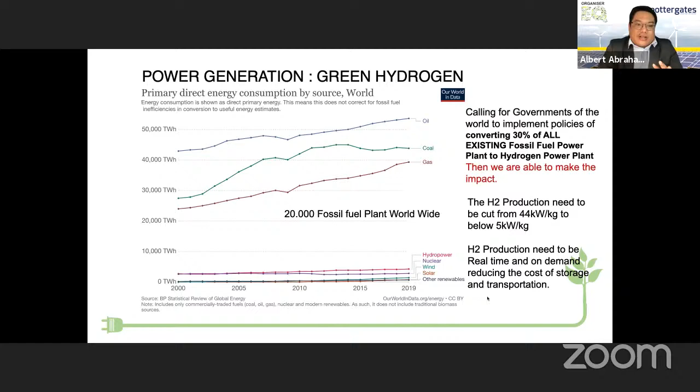One area we need to focus on is hydrogen production. We need real time, on-demand production, because the cost of storage and transportation would really drive hydrogen cost up. So that's something we must look into - how do we produce hydrogen in real time for on-demand purposes. This is another dream in regards to power generation.

The second dream is in terms of transportation. Transportation is actually the second largest greenhouse gas emissions sector. My suggestion is a 3-step approach. One, converting existing vehicles to hydrogen-based vehicles - there are two ways: diesel engines running on hydrogen fuel, or electric cars using hydrogen fuel cells instead of batteries. Second, new cars or trucks with electric motors running on hydrogen fuel cells with a hydrogen tank. Third, getting a hydrogen generator efficient enough to retrofit into a car or truck to generate enough hydrogen needed for the vehicle. This is my second dream in terms of transportation.

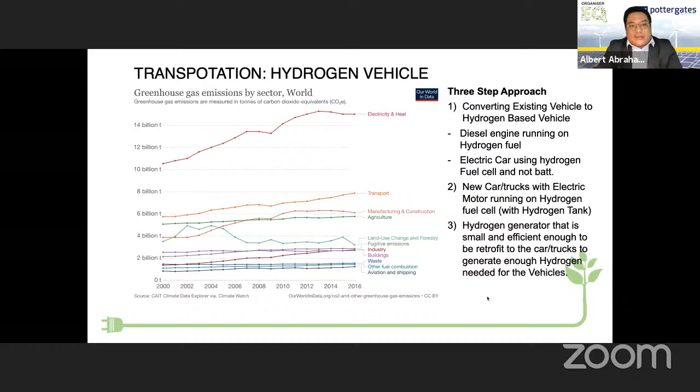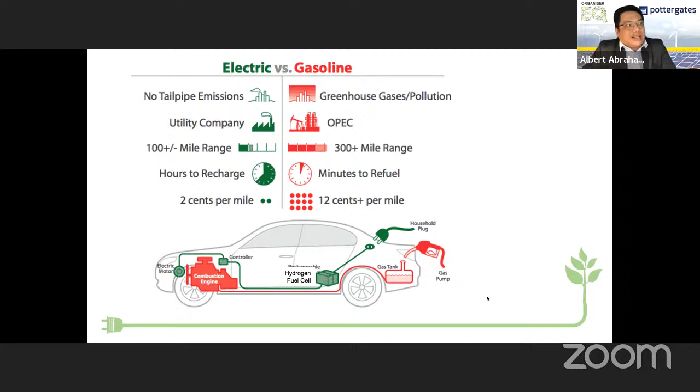Let me give an illustration of this dream. In the market now, people compare electric cars versus gasoline - the pros and cons of each: whether the recharge time is too long for electric versus gasoline taking less time to refuel, electric mileage being low versus gasoline mileage being high, and so on. So why not go into the future of hydrogen, where we retrofit the car into a hydrogen generator, change the fuel tank into a water tank, feed it to the hydrogen generator. The hydrogen generator can power the hydrogen fuel cell for the electric motor or controller, or the hydrogen can be fed into the combustion engine to run the car. Why not have the best of both worlds?

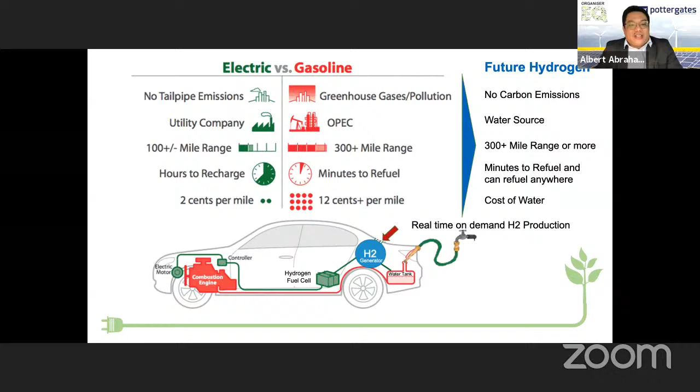So you'll have no carbon emission, you just need a water source - no utility company, no OPEC or anything like that. In terms of mileage, you have high mileage, and for refueling, you just pour in water, so it doesn't take much time. The cost of the fuel is basically just water. This is why I call it a dream, because it will take a lot of research for us to get there.

So what does the future look like in a more logistic way, on a larger spectrum? Hydrogen's energy density per unit mass is three times higher than traditional jet fuel. So why not have an airplane that runs on hydrogen fuel, with a hydrogen generator that generates hydrogen from water collected from the clouds? You've seen Lost in Space, where they harvest ammonia from the air, process it and use it - something similar could be done here.

Why not an airplane that can fly without even needing to land, collecting water from the clouds and using a hydrogen generator to generate the fuel required for the engine to run. Of course this is just a dream - the technical part I'll leave to the engineers, aerospace people and others to come up with possible pilots or something.

Then in terms of cars - a car with a hydrogen generator that runs on fuel cell or hydrogen engine, just pour in water and it can run. And I'm even saying a flying car with hydrogen fuel cell, because the energy density is so high you can actually boost up the car. Whether fitted with a jet engine or whatever, if the technology is available in the future, you could even fly the car. With hydrogen fuel, we are entering a new era of opportunity.

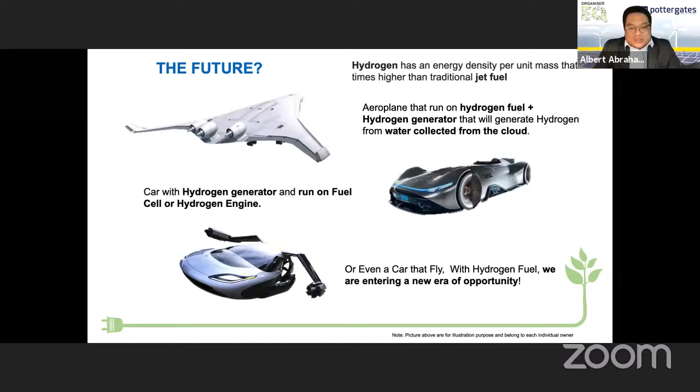That's the dream I wanted to cast out to everyone, and I'd like to see your feedback. All right, thank you everyone.

Thank you, Albert. To be honest, it was a bit more dreaming than what I expected, but it's okay.

That's why it's a dream.

What first came up to me was the second slide, where you stated that electricity consumption should go from 44 kilowatt-hours per kilogram to 5 kilowatt-hours per kilogram. That's a huge ambition. We all know electricity consumption is the elephant in the room, the main driver to make green hydrogen really cheap. But going from 44 down to 5, what do you think needs to be done, and do you have any assumptions on how this can be realized?

Actually, there is research that partners of ours have done, and basically they have reached that level already. It's just a matter of commercialization now. So you'll probably see the product coming out mid of next year, or mid to end of next year.

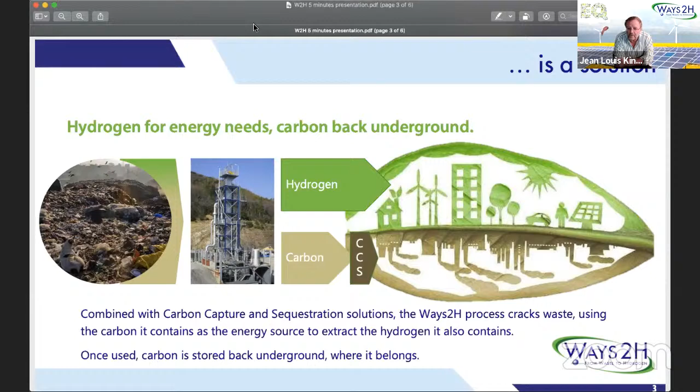A few words about what we specifically are doing. We are commercializing a solution that has been developed in Japan over the past almost 20 years. I was actually in charge of engineering and building the very first pilot of this solution, which specifically targets small to medium scale production systems.

There are still a few challenges about hydrogen logistics. What we promote, what we think is an easier way to develop this hydrogen infrastructure, is gradually - just like gasoline stands started in the early 20th century, when people bought gasoline at drugstores, and then the first gasoline stands appeared, peaking at about 200,000 in the United States in the 60s and 70s. We're now at 110,000 gasoline stands in the United States. Well, let's build hydrogen stations one by one, possibly ten by ten - that would be a little better.

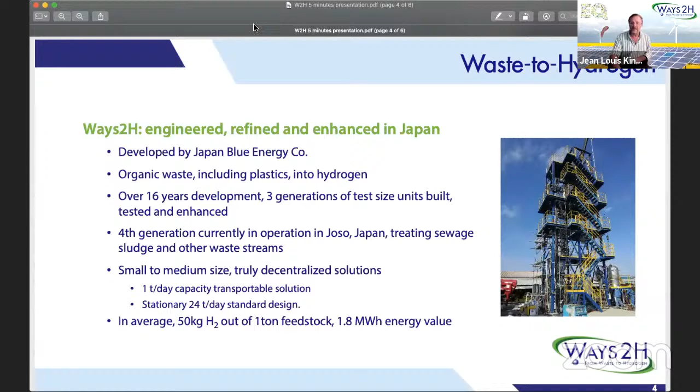Also, gathering $500 million or $1 billion to build the equivalent of a nuclear power plant takes time and is a major risk. Reducing risk by reducing the individual investment or the individual size of the project is also a way, I believe, to more smoothly and easily develop this infrastructure that we badly need - that truck manufacturers, forklift manufacturers, car manufacturers badly need today, because you cannot sell a fuel cell car if you do not have a wide hydrogen production grid. This is what we think we can offer as a complement to green hydrogen solutions, which are also very useful.

They all have their cost. We talked about how many kilowatt hours are needed to produce hydrogen, etc. I think it's very important, but gasoline production as well as other energy sources development, well, initially those were not that efficient, and efficiency has increased over the years. This is something that I believe will also happen with hydrogen, as long as we keep trying to be realistic.

And sorry, Albert, but the dreams are great. I think it's very important to have a vision, but to make real and concrete progress, we first have to stick with reality and tackle actual and very current problems.

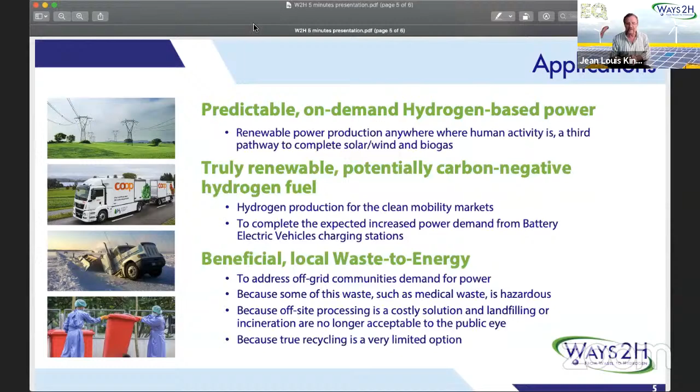How much of the total hydrogen used today do you think can be made out of waste recycling? And second, connected to this, what do you think the lowest possible price could be to make hydrogen this way?

The US Department of Energy released a report in 2017 called the Billion Ton Report. It's called that because they identified potential sources for biomass, including ag waste in the US, amounting to above a billion tons. I think they were saying about 1.2 billion tons.

When you look strictly at the chemical formula for that biomass, you realize this billion-ton biomass is the equivalent - you could potentially extract about 50 million tons of hydrogen. And 50 million tons, considering all the relative efficiencies, if you look at the power of the gasoline-based powertrain versus the hydrogen-based powertrain, that's the equivalent of 90% of the gasoline being consumed in the United States today.

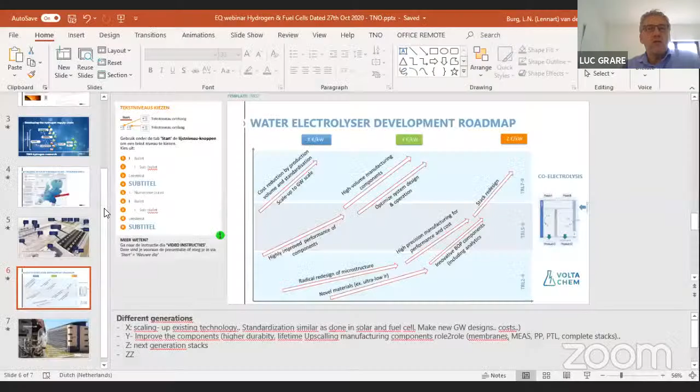I'm leading the hydrogen development at TNO. TNO is a research institute in the Netherlands. We work with around 1,000 people, experts on renewable energy. And the reason why we work on renewable energy is, you all know, we are breaking records with respect to climate change. This is only the newspapers of the last week - the Netherlands had the hottest day last week, but also high snowfall in Canada, and California is getting severe weather conditions, and the greenhouse gas emissions are just rising.

And I think that's why we're all joining to develop renewable energy and also hydrogen, which will take a major role, as said in the introduction, to replace fossil fuels where there is no other option. So where electricity is coming too short, there hydrogen is coming in.

Yeah, and we're breaking records. Unfortunately, that's the situation, I think. I think we should put our efforts - and that's the objective of our research institute, for the energy unit at least - to work on technologies which also behave to come with solutions.

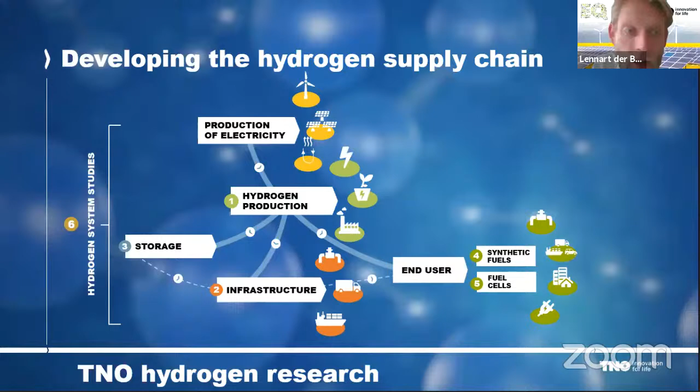And in our project we really look at where hydrogen can really be a solution. So our statement is: where we can use electricity, we should use electricity, and where there's no other option, please go to the hydrogen route.

And we also, at a certain moment, are exceeding the electricity use in the Netherlands. So, as the previous speaker already said, we're using much more fossil energy compared to electricity use. So part of it will be electricity, part of it will be hydrogen.

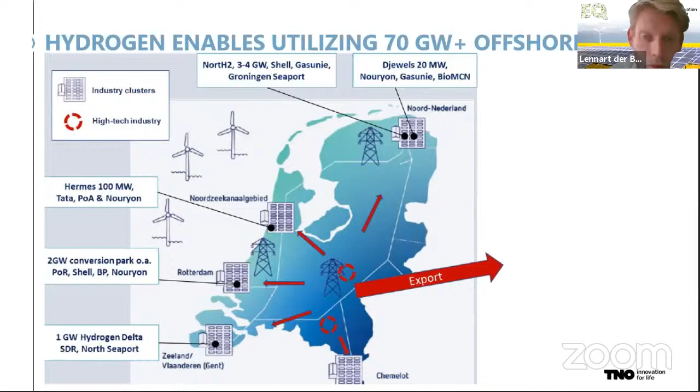To give you an impression, in the Netherlands now the current hydrogen production is 1.6 million tons of hydrogen, but it's all gray hydrogen. If we want to go to green hydrogen, we need huge amounts. And over the last 10 years, the total installed capacity of electrolysis is 160, 170 megawatts worldwide.

We need the power electronics, we need the demi water, we need the compression, we need the cooling. So this total plot size will be around 10 to 20 hectares. And we did preliminary designs with partners, with ISPT and industry partners, in different parts of the Netherlands.

And this is the roadmap for how we think the electrolyzer development will further continue. These are different generations - generation X, Y, and Z. The first challenge is standardization. You see all the electrolyzer manufacturers focusing on standardizing their products, now mostly containerized, and focus on design - so teaming up with EPC contractors.

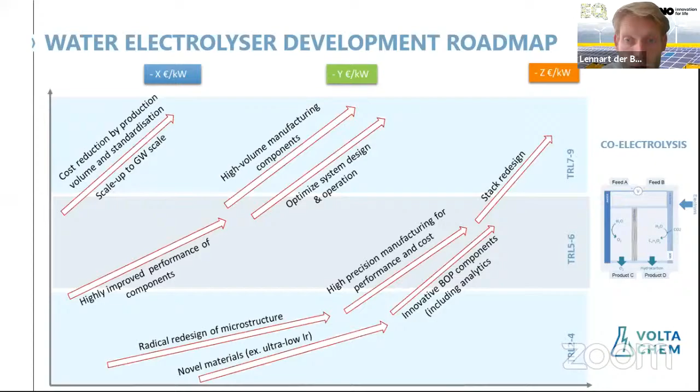The next step we see in the future is really co-electrolysis. We now talk about a lot of water electrolysis. The next step is really, beside water, also using CO2 and making fine chemicals using electrochemistry, and that we're doing in our VoltaChem program. And lastly, this is where we're doing our research.

But if we really go to gigawatt scale using the PEM technology, we need the worldwide iridium stock, the availability of all the iridium only for the electrolyzer. So this is a material issue, and other issues we definitely should solve to go to the gigawatt scale.

And the other important issue is obviously we need renewable electricity, and we really need a lot if we want to replace all the fossil fuels. So it will be a combination of green hydrogen and also low carbon hydrogen, and using electricity directly.

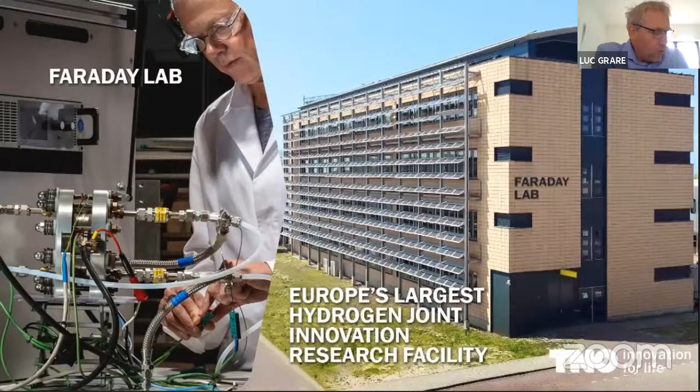I've got one question. I 100% agree with you that we need to come to below 500 euro per kilowatt peak, all in, connected, etc. Now, what is your idea which year we might be there on a gigawatt scale plant in Europe? And what do you think by then probably could be the electricity consumption we talked about before? But I think that's also to see those two parameters.

In the FCH Joint Undertaking strategic roadmaps are concrete targets for where you want to go with respect to costs. In practice, we see the really large projects - a lot of costs coming extra, the infrastructure costs, etc. So I think the cost level where we are now, let's say around 1,000 to 1,500 euro for an alkaline system completely installed. If we want to really go to cost reduction, it's all about volume, because all the electrolyzers now are handmade nearly. So if we need to go to higher units, and if we break that level, then we are able to go to cost reduction. So that will be in the next, let's say 5 to 6 years, where we're reaching below the 500 euros, if we really go to the high numbers, because that's really important to create that volume.

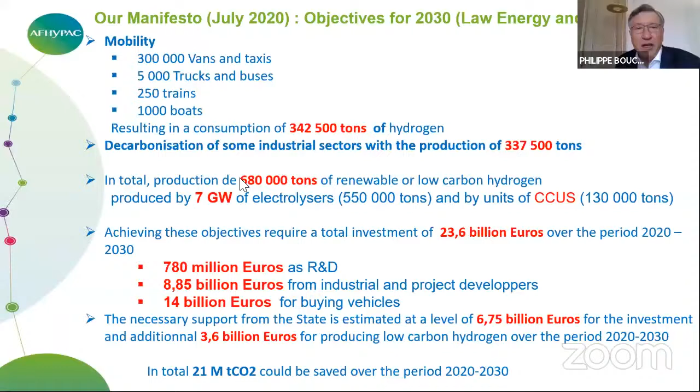This was the situation end of July, and then on the 8th of September, two ministers presented the French hydrogen strategy. This time it's not only the Minister for Ecology, but also the Minister for Economy. It is considered as part of the recovery plan after, or during, COVID. It is also in line with the objectives of President Macron to develop a French industry on a new basis, based on new technologies - IT, of course, but also hydrogen.

Second pillar is to develop professional mobility - heavy-duty mobility such as buses, coaches, trucks, garbage trucks for municipalities, and so on, but also vehicles for transportation of goods, what we call last mile mobility. This implies developing vehicles and components for vehicles, but also infrastructure for refueling. The third pillar is to maintain efforts for research, development, and innovation.

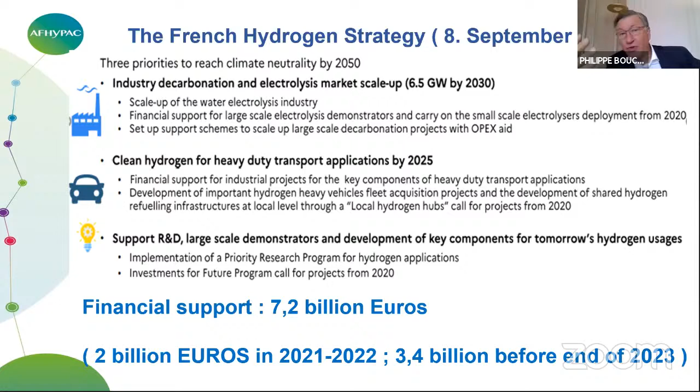The support from the French government takes multiple forms. The aim is to bring this support along the complete value chain of hydrogen: first, to produce electrolyzers and develop gigafactories of electrolyzers, but also to foster the demand of hydrogen for the decarbonization of industrial sites, to produce equipment for H2 mobility and hydrogen vehicles, and also to develop infrastructure for transporting, storing, and distributing hydrogen.

It will be done through calls for projects, which will be managed by the French Agency for Ecology, ADEME, and also through a very important tool, what we call IPCEI, Important Project of Common European Interest. This approach was used for batteries, and France wants this to be done also for hydrogen.

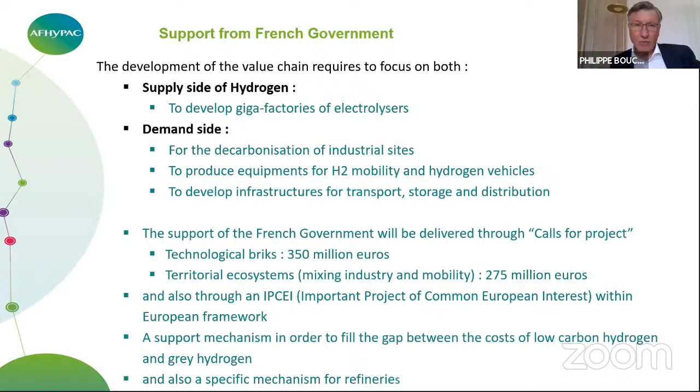For that, there is a strong necessity to scale up to achieve mass production. I already mentioned gigafactories for electrolyzers, and that we need by 2030 7 gigawatts of electrolyzers in France. At the European level, there is this initiative of 2 times 40 gigawatt electrolyzers. So we also have to reach the scale of millions of tons of hydrogen.

Second key challenge, which is very important as well: we all consider that, of course, we have to go towards renewable hydrogen. But for that, we need renewable energy. And what if the development of this green electricity is not fast enough? We also have to consider alternatives like carbon capture and storage. In France and some other European countries, nuclear power, nuclear electricity. And also, as Germany announced, to import green hydrogen from countries where renewable energy is abundant, North Africa for instance.

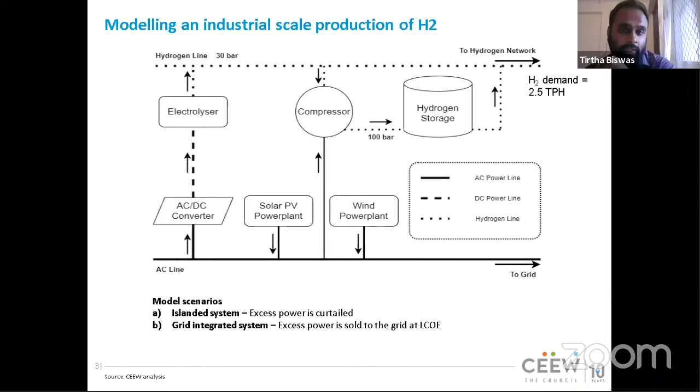The electrolyzer is coupled with both solar and wind, and we also have storage to ensure that a constant demand of 2.5 tons per hour of hydrogen is met at all times. We looked at 2 different scenarios: one is an islanded scenario system where excess electricity from renewables is curtailed and the cost is borne by the hydrogen consumers. The other is a grid-integrated system, although one-directional, where we assume excess electricity can be off-taken by the grid, with an additional revenue component.

Interestingly for India, we tried to identify future demand centers, taking as a rule of thumb the metropolitan cities and major industrial clusters like iron, steel, fertilizer, refinery, and petrochemicals. Interestingly, we also see that the majority of demand clusters today only have access to solar profiles, solar resources. So we chose locations we're calling favorable because they have both solar and wind together, mostly in the western and southwestern parts of India.

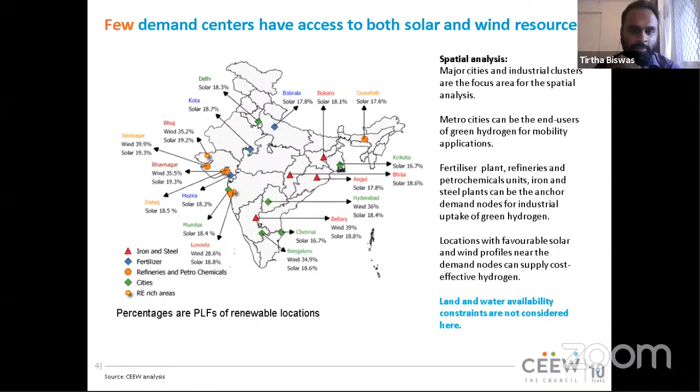That means you're having a stable capacity factor throughout the year, which also means that the electrolyzer can have better full load hours, and hence reducing the costs.

The second part, what we also see is, as you keep on increasing your renewable system size, there comes a point where your cost decreases, but beyond that point, there's no further impact. That point is basically where your electrolyzer achieves the maximum plant load factor. For a green islanded system, if you keep increasing beyond that inflection point, your cost increases because you're curtailing more, which is indicated by the graph as a U shape.

Whereas for a grid-integrated system, what happens is the excess electricity, since it's being off-taken at the LCOE prices, does not impact your levelized cost of hydrogen. So basically, as you keep on increasing your RE to AE ratio, your hydrogen cost sort of flattens out.

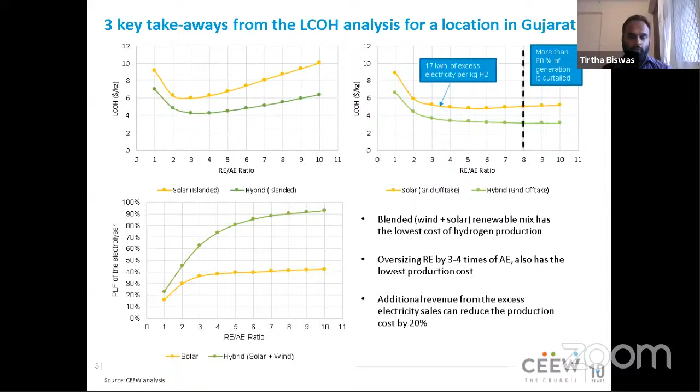The third point we see here is, in the short to medium term, if you can sell that excess electricity to the grid, you are reducing your cost by 0.7 to $1 a kg, which is roughly 20% of the production cost for that particular location in Gujarat.

However, if you see in the graph on the right, a developer might choose to operate at a very high RE to AE ratio, something like 9 and 10. But operating at that point means he has to curtail 80% of his total generation.

Now, the problem is not with the 80%. The problem is basically that the 80% is available only for certain hours of the day. And your grid needs to be flexible enough to absorb all that electricity.

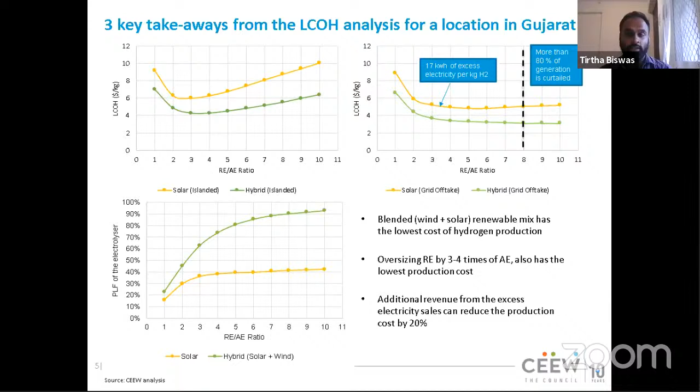To give you an example, for that particular location in 2020, to produce 1 kg of hydrogen, you are generating 17 kilowatt hours of excess electricity. So the grid needs to handle all of this just to ensure that the cost further reduces.

What we see in 2030 is most of the locations can become competitive with blue hydrogen plus CCUS, at a natural gas price of $11.5 per MMBTU. In 2040, all locations become competitive with blue hydrogen at a natural gas price of $6.3 per MMBTU.

Now, there's a reason why I'm using two different natural gas prices. In India, the price of natural gas is not market-driven. There are tiered systems. Certain strategic industries like fertilizer and urban transport get natural gas at cheaper prices, whereas most industries today are paying somewhere close to $11.5 per MMBTU.

While one may argue that the global prices, the Asian LNG prices, are certainly lower, if you look at India's contracts, they are still oil-linked and pretty much hovering around more than $10 per MMBTU. Now, one interesting observation is, if you look at the wind and solar locations, they have a particular cost advantage compared to your solar-only locations.

What it also means is that by 2030, they can easily break even with the cheapest blue hydrogen in the country. And by 2040, they can become competitive with the gray hydrogen produced in India.

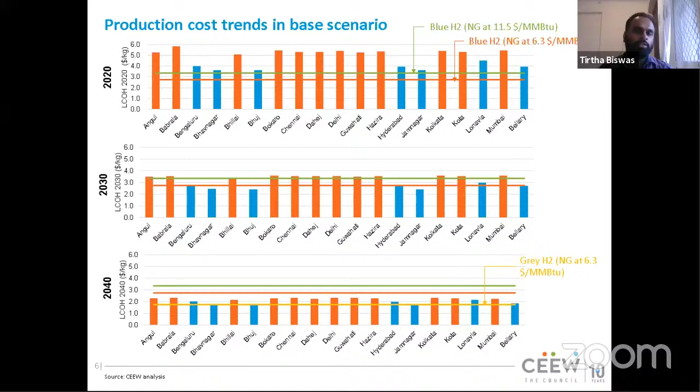And it's almost a chicken and egg situation. A pipeline cannot be invested in until you have demand. And if you don't have cheap, low cost hydrogen, you just can't create the demand. So that's where policy actually assists.

So finally, I want to close off with this slide and also pose a question to my fellow panelists.

In one scenario we saw, using the most aggressive reductions in electrolyzer cost to $200 a kilowatt, hydrogen storage cost to less than $100 a kilowatt, 8% discount factor, we see that the cheapest India can produce hydrogen is $1.7 per kg. While it might be at that price of $1.7 per kg, you might actually break even with coal and lignite products, which is used mostly by your iron steel industries, and then to some extent furnace oil, which is used in industrial heating demand.

But for hydrogen to truly displace the bulk of the Indian industry's energy need, it has to displace coal, right? And the equivalent price is 0.7, or 70 cents per kg. So the question is, is that even achievable? And what are the further policy nudges that we need to make to bridge the gap? So with that, I close my presentation and I can take further questions.

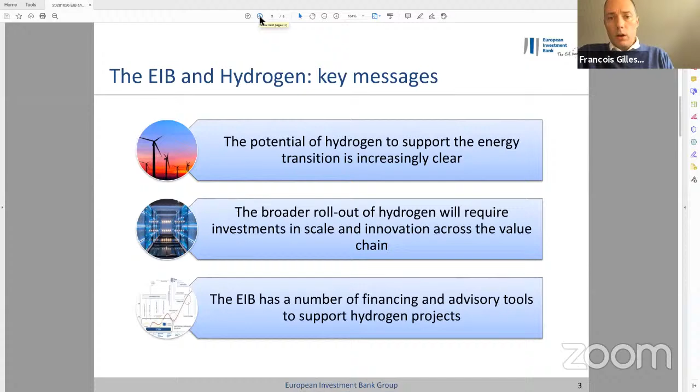That being said, much more broadly, we have our balance sheet, and we have the ability to support much larger, well beyond impact finance, hydrogen infrastructure projects. But I think there we will probably need to see a phase of transition, and probably in the short term it's more likely that our impact finance tools, which have a higher risk absorption capacity, are called to use.

And then on the advisory side, I come from the advisory part of the bank. Advisory is one of the origination points into the bank, and we provide support, advice, sometimes consulting support to promoters, in various ways. I think that's one of the ways we see our potential contribution to the development of hydrogen, by helping these consortiums and large project ecosystems that are complex by nature and have a bit of self-discovery. We potentially have a role to play here, helping these consortiums find their way to a market aligned, potentially investable and bankable proposition.

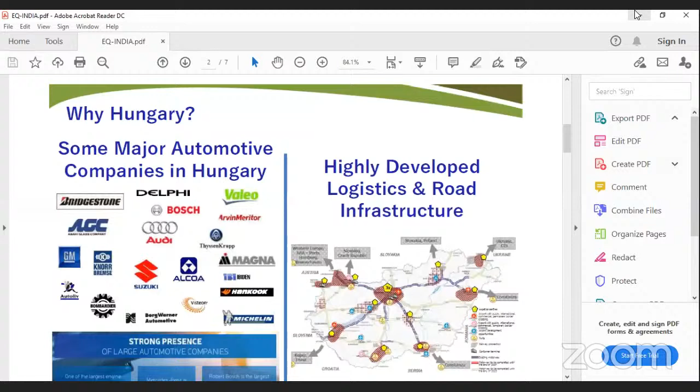Moving on, the very first question is why Hungary? As you might be aware, there are very big companies involved, especially from the automotive sector in Hungary. As you can see on the left-hand side of my slides, the presence of, for example, Audi from Germany, Mercedes-Benz, and Bosch - they're big names, and they have their local manufacturing plants in Hungary, plus a few other names on the list.

The other very important reason we were looking at this market, especially for fuel cell development in the eastern part of Europe, was that we compared different countries. We looked at labor cost versus production cost in UK versus Germany versus France, and took some data from Hungarian manufacturers. The very first thing which was interesting was the labor cost was roughly half of what we would expect if we made this bus in the UK, for example.

The second thing we found is the corporation tax for businesses running in Hungary is the least in Europe, which again favors this kind of business if you want to do production in Hungary. And the other reason, as you can see on my slides on the right hand side, Hungary has a very good interconnect with other parts of Europe.

For example, it has a very good network with Poland, Slovakia, Ukraine, and the western part, for example Germany, Serbia, and also Croatia. So it means you are in the central hub of Europe, and you can easily connect to different parts via ships, via road, and via other networks.

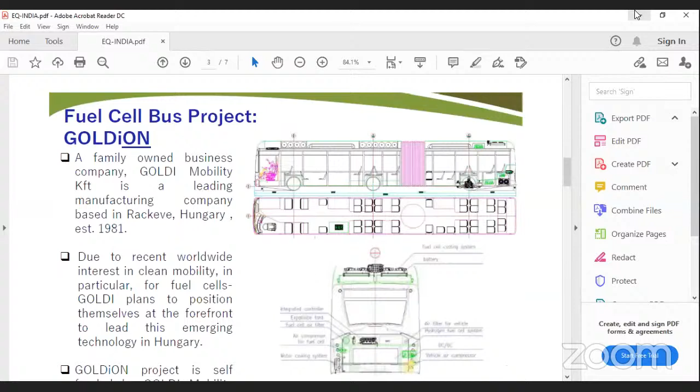Okay, so the project itself - the project name is GOLDiON, named after the actual company name, which is Goldi. This GOLDiON project is mainly financed and run by GOLDI Mobility Kft, which is a Hungarian company. It is a family-owned business, a leading manufacturing company, based in Rackeve in Hungary, and it was established roughly 40 years ago.

So it has a very strong reputation in Hungary, and they are mainly the manufacturer of various key components for electric and diesel drivetrains, and now they are looking to move forward from fossil fuel based mobility business to clean energy, mainly pure electric and fuel cell electric business.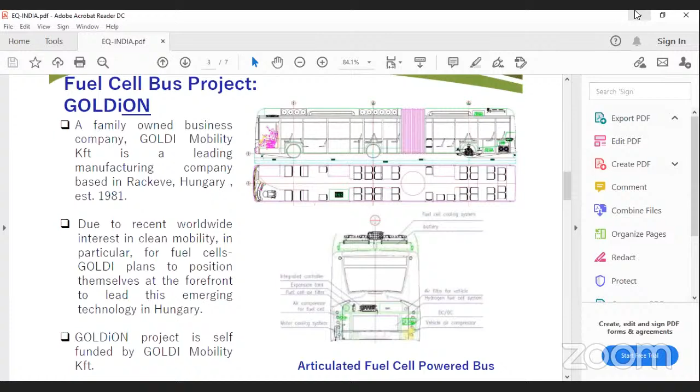Due to recent worldwide interest in clean mobility, they were looking to partner with other key players, especially to set up the supply chain, not only for the fuel cell, but also for the hydrogen production and hydrogen refueling business. And as I mentioned, this project is completely phase one, which I will mention in my next slide, fully funded by this company.

In terms of the business plans for the fuel cell buses, we plan to split this project into 3 key phases. The first phase, which is already in development, is the first 18-meter prototype fuel cell bus, which we are developing as we speak in Hungary.

The second phase is a rollout phase, meaning once the first phase is done, we will try to market this bus to other parts of Europe, and also locally in Hungary, to get attention and possibly orders, and roll out multiple buses. This would include assembly of both 12-meter and 18-meter buses in Hungary for rollout to various parts of the EU.

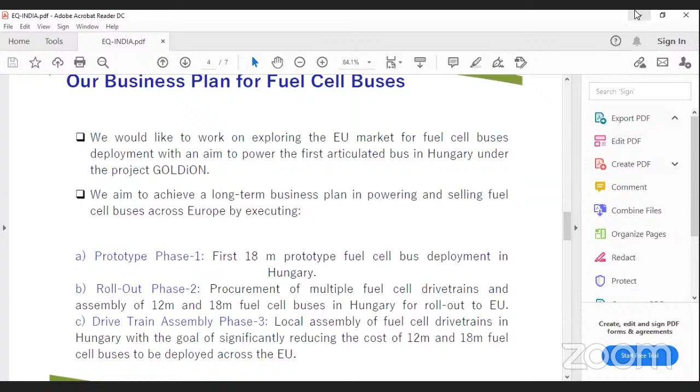The third part is a further extension of phase 2, moving on to phase 3. In phase 3, we plan to develop a local drivetrain assembly, going deeper into the fuel cell drivetrain, meaning we look to locally assemble all the parts. The key thing here is we also aim to locally assemble the fuel cell modules in terms of stack, and then the balance of plant altogether - so it's a complete fuel cell stack assembly as well as the drivetrain assembly.

As you'd imagine running this kind of project, funding is one of the key challenges anyone can face, especially moving forward from the first prototype, phase 1, to phase 2 and phase 3. So earlier this year, in February, we held a meeting with the local Hungarian investment promotion agency, called HIPA.

Together with our fuel cell stack partner, Horizon from Singapore, their CEO attended that meeting. I was there, along with the CEO from GOLDi Mobility, and some local government people. We initiated discussions regarding phase 2 and phase 3, and were asked to submit a proposal. We have just recently submitted it and are looking for the outcome. The plan is to get some part funding for phase 2 and possibly phase 3.

A very brief summary: we believe Hungary is an ideal location, as I've mentioned before. There are key advantages in terms of the favorable automotive market due to the strong presence of key players. The second biggest advantage for us is the labor cost versus the low corporation tax.

The GOLDiON project, as we speak, is moving forward, and we are in the development stage of the first 18-meter FCEB bus. We are in high-level discussions with government representatives for phase 2 planning. We are also talking to supply chain partners for batteries, supplies, hydrogen tanks, and just today I was talking to some suppliers for the refueling business for our buses.

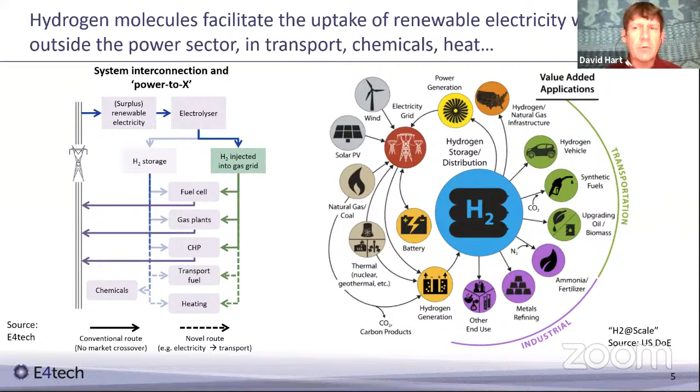I think we all need to be cautious about not over-promising what might come. Because what I want to talk about in the next couple of minutes is two things. Hydrogen gives this opportunity to incorporate renewables further into the energy system. We've seen this diagram slightly redrawn already this morning, but it's really important - it enables this decarbonization of the molecular side of the energy industry with the electronic side. So we take renewable electrons, turn them into renewable molecules.

Having said that, we've talked a lot about cost, and what we're really looking at here is a system - it's a system cost, it's a system benefit. So just the cost of hydrogen production is not what we need to look at. What we need to understand is what are the avoided costs, for example, of alternative storage mechanisms? What are the avoided costs of pollution, of people dying from air quality effects?

What about carbon emissions? That's really what we're driving at. So we do need to be competitive, but we need to be competitive on a system basis - producing hydrogen for a reasonable cost and then using it in an intelligent way to displace something which is otherwise less efficient or more polluting or otherwise does not give us a benefit. And that's really important, because that will also cause disruption.

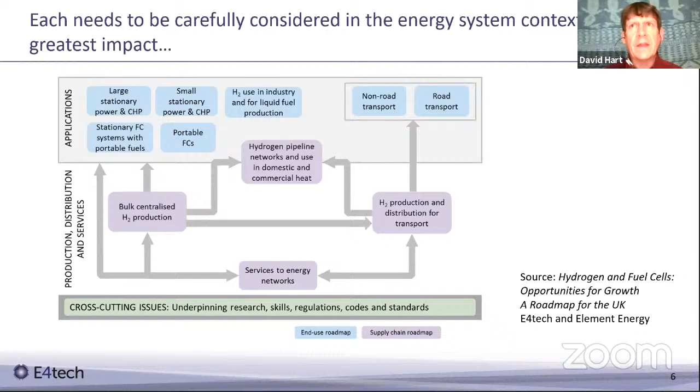And we see this already. We've talked about India - there's the opportunity there - but in Southern Africa, in Southern America, we see the opportunity for new suppliers of energy. This will displace the fossil fuel industry. If you look at what Shell is doing, what BP is doing, what others are doing, they're very, very concerned about how they will continue to exist in a low carbon world.

So when it comes to the end of 2030, I suspect, and we're looking forward to a new decade, it's not going to be just about competing on cost with existing fossil fuels. It's also going to be making sure that we have convinced the investors, the institutional investors into these large companies, that these companies are climate resilient, that they have a plan going forward which is low carbon and very likely includes hydrogen.

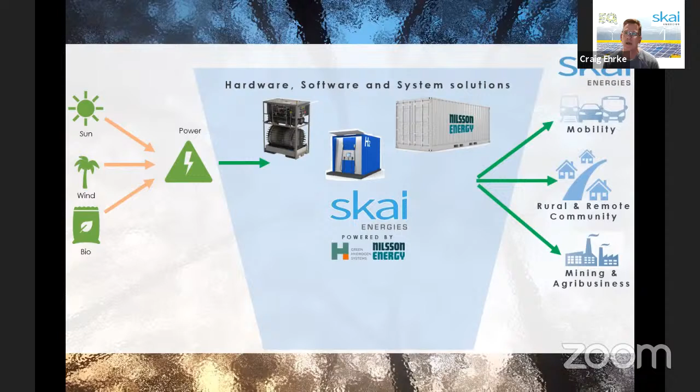Great, thank you, Luke. What I wanted to talk about was more where we are today in Australia, guessing that will probably play out into a lot of other countries as well, looking at what drives circular growth from this point, taking into account the things that have gone before. Just quickly, Skai Energies has some European partners who make electrolyzers and standalone power systems. We take ideally green renewable power and use that to provide energy across the mobility space, remote rural communities, mining and agricultural spaces.

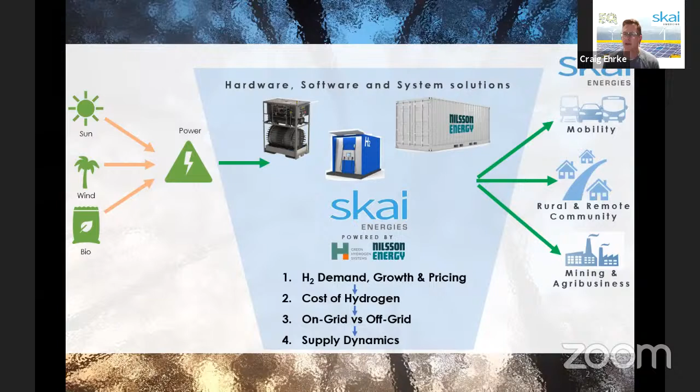What I looked at though is really what's driving demand, but more importantly, growth and pricing. There's been a lot of great comments today about growth coming from looking at where we can displace fossil fuels today. If there's diesel being used to power mobility or run remote communities and mining communities, if we can displace that, we can obviously get growth today. As someone mentioned today, pricing is critical, and until we can really meet the price of the fuels we're trying to displace, we will struggle to get true hydrogen growth.

We all know how hydrogen is manufactured. Some of the big things that really impact the cost are the cost of the inputs - the power and water used to produce it. But also one of the things I'm finding really critical is the amortization and the use of the electrolyzer itself. They are very expensive today, and being able to utilize that for as long as possible in any given day is really critical to driving those prices down.

Jean-Louis talked earlier about doing it on a very local, decentralized manner, and that's also critical because the cost of transport can be quite high, and it all adds to the cost, which impacts pricing and makes it an unideal solution. To try and help that, we look at on-grid or off-grid generation, and the problem with doing it on the grid is the congestion issues of many grids and their ability to cope with the large amount of power required to run electrolyzers.

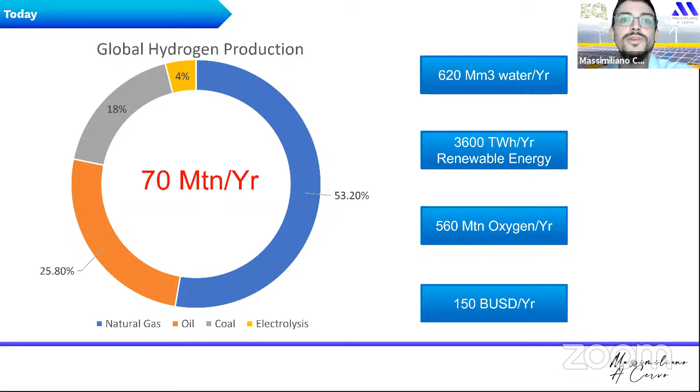So talking about renewables and achieving a hydrogen economy, this is actually where we are trying to go at the moment. What we need to think is that hydrogen was once green—around the 1920s, 1930s, there were a couple of green electrolysis plants from hydro. They were using it for fertilizer production. So we need to think about what happened in between that made what was once viable, unviable.

So it has to be basically about scale and cost, and the cheap cost of fossil fuels. So how can we begin to decarbonize hydrogen instead of trying to sell hydrogen to whatever use we can think of? Just think about which could be the economically viable sectors to decarbonize in the short term.

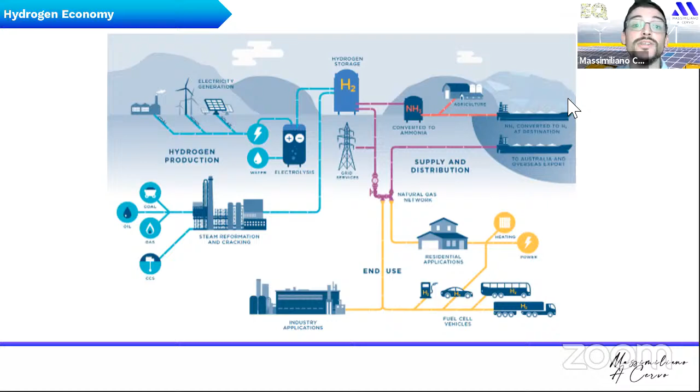So this is basically my analysis. My strategy would be considering an immediate off-taker—sorry for my misspelling here, this should be with an N, but don't worry about this. Basically, considering accelerating the pace of the hydrogen economy. How do we manage to do that? Well, we already talked about decarbonizing the existing demand, and doing this in the short term is going to be very hard.

So we should think about which energy mixes can actually give us the best load factor to achieve a lower levelized cost of hydrogen.

So I was doing some kind of analysis for the industrial sector. The industry sector, without thinking on refineries, because that's a hard level and a hard sector to reach with hydrogen at the moment, we would need around 37 million tons a year of hydrogen.

So what are we going to use to decarbonize that sector, which actually would need around $74 billion a year of investment? This can sound like a lot of money, but it's only 5% to 7% of global investments in oil and gas, and around 7% of the technology investment in the S&P index. So it's a lot of money, yeah, but it's achievable.

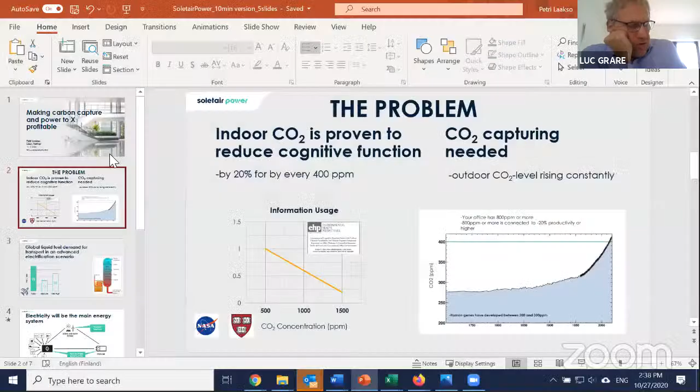Thank you very much, Massimiliano. Thank you very much, 5 minutes well spent. We move on with the next speaker. Please, maximum 5 minutes, we're running out of time. I would like to ask to the stage Petri Laakso from Soletair Power. They have some very nice innovation. We talked before about another presentation about the CO2, but they will talk about CO2 in buildings. I think it's a very nice solution, although maybe some depth about that you can talk about. How is this going to move with people working more and more from home and probably less in office, but maybe that's another challenge. Please, Petri, go ahead.

Thank you, Luc. I hope everybody sees the slides. Yeah, we see it, yes.

Yeah, I have a really bold statement in the beginning: making carbon capture and Power-to-X profitable. I'll explain it a little bit later, but the challenge that is not addressed today is that CO2 capturing is needed. Why would we need that? Because the outdoor CO2 level is rising constantly, due to climate change and human action, because we are releasing CO2 into the atmosphere. Our genes have been developed in the 200-300 ppm region.

Now since the CO2 level is going up, and indoors it's going even more up, we have problems with our cognitive function. It's scientifically proven that indoor CO2 reduces the cognitive function of people by 20% for every 400 ppm increase. This is verified by NASA, Harvard, and other institutes.

So even if hydrogen is really something we need, we would also need to have carbon capture and a lot of renewable energy to support the need for energy. Another part of our company is that we can make fuels out of the captured CO2 together with hydrogen.

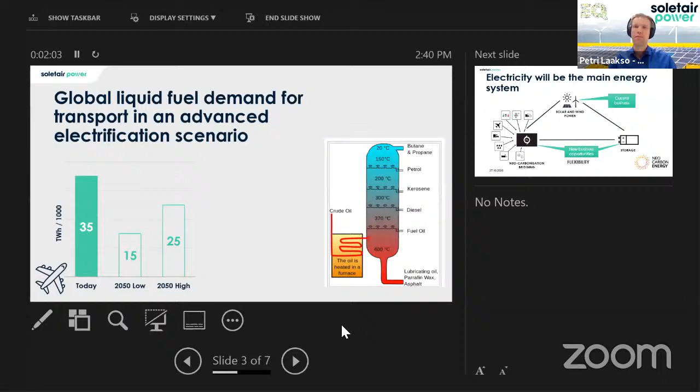Fast forwarding, we think that electricity will be the main energy system, so that we can do hydrogen and all other things also. Solar and wind are now the cheapest ways of producing electricity, and the trend is going lower and lower. Already 10 euros per megawatt hour solar is possible today, and wind is somewhere like 30, but they are fast coming down. New business opportunities are in CO2 capture and recirculation.

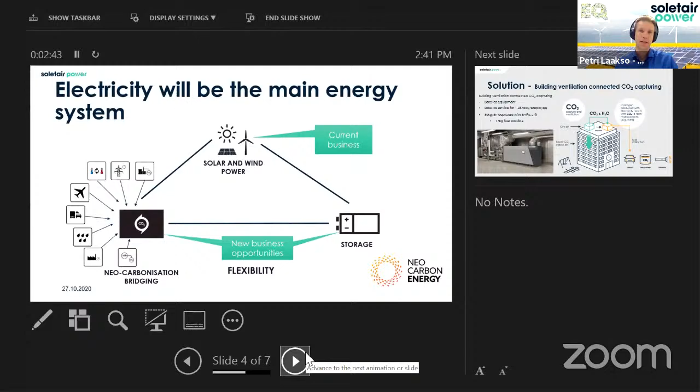We also need a lot of different kinds of storage options and business. Our solution is a building ventilation connected CO2 capturing, so that people can perform better indoors and have more well-being. There's a lot of buildings in the world - actually real estate is the biggest store of wealth of people. We can sell this as a service for $1 to $2 per day per employee, which is the same as coffee benefit cost for employees, but we have scientific proof to make people more well-being.

If all the buildings in the world were equipped with our technology, we could easily produce all the hydrocarbons needed in the world. With one single unit, we can do 50 kilos of CO2 capture in 8 hours, and that can be turned into 17 kilos of methane.

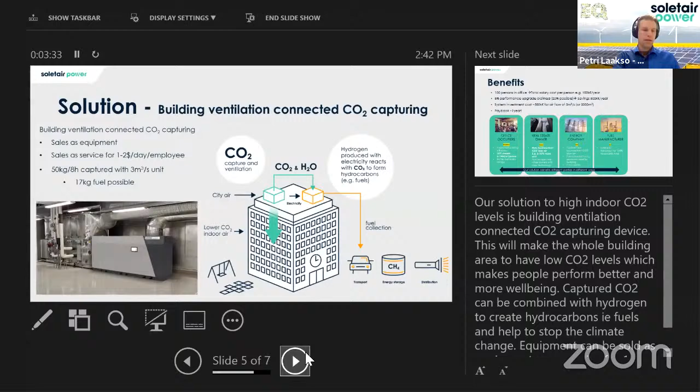Going forward, the benefits and how we can do this profitably is that when we charge 1 to 2 dollars per day per employee, that makes it profitable, and then the fuel can be sold at a normal cost. Our fuel production cost depends highly on the electricity price - if electricity is 1 cent per kilowatt hour, then our fuel production cost is 25 cents a liter. But since Power-to-X is capex intensive, investment is the biggest challenge. In our case, the office occupiers benefit most from this, and the benefit is thousands or even tens of thousands of euros per person per year.

Everything must start from renewable energy, and there's been a lot of discussion that we need this much hydrogen and this much of that. But the challenge starts with where do we make the energy that we really need? That is something where we need a lot more solar and wind - and why not something else if it's possible to have it?